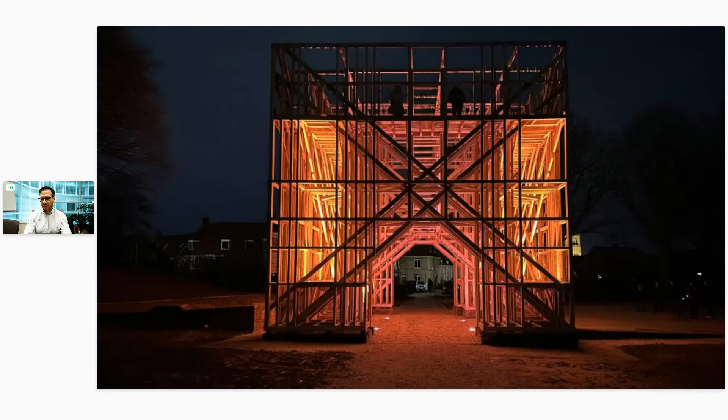She's working for AXISVM, and she's our expert. No one knows more about parametric design than her at our company. The next speaker is going to be ARC-S. Sorry, I messed up the slides, but no matter. One second. Oh, yeah. Just a few references.

So ARC-S is a Hungarian company, an innovation and technology company, consultancy firm focused on delivering innovative, sustainable, and efficient structural design solutions using state-of-the-art digital tools and engineering methodologies. The company combines technical expertise with continuous development, supporting their clients in creating economic, sustainable, and adaptable designs.

Our second speaker will be Summum Engineering, and they have these references that I'm showing on the slides right now. Summum Engineering is a structural design, engineering, and optimization consultancy founded in 2017 and based in Rotterdam, Netherlands. It operates in the domains of architecture, engineering, and construction, as well as industrial design and art. Specialties include the parametric modeling and structural engineering of lightweight structures, natural building materials, complex geometries, and sustainable buildings.

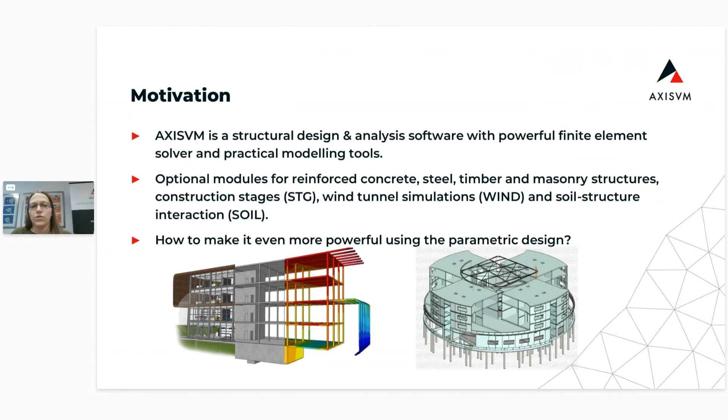This is a very strong package, I think, but we can never be completely satisfied. We always try to find how to make it more useful and more powerful. And in this webinar, the guest presenters and I show a bunch of ideas how to extend AXISVM capabilities using parametric design. First, let's take a look at parametric design in general.

In traditional computer-aided design, the so-called CAD process, the user must basically know the position of the lines and surfaces right from the beginning. Every item is created by direct manipulation by hand. And almost 25 years ago, some developers started to break the limitations of traditional CAD modeling. GenerativeComponents by Bentley was the first parametric design software for architects. It was published in 2003 and officially released in 2007.

Another milestone was the release of Explicit History. Nowadays, it's called Grasshopper, and this is a visual programming interface for the Rhino CAD software. This turned the design process from modeling with direct manipulation to another logic I'm going to describe now. What is parametric design? I tried to find a short and simple definition for parametric design, and I decided to explain it as programming-aided design.

But don't be afraid, by programming I do not mean coding in Visual Studio, etc., but rather the joyful visual programming or maybe some scripting. But I could say algorithm-based design as well. The main point is that instead of directly creating and manipulating each and every item of a model, users build algorithms. An algorithm is practically a function, a collection of rules, relationships, or transformations.

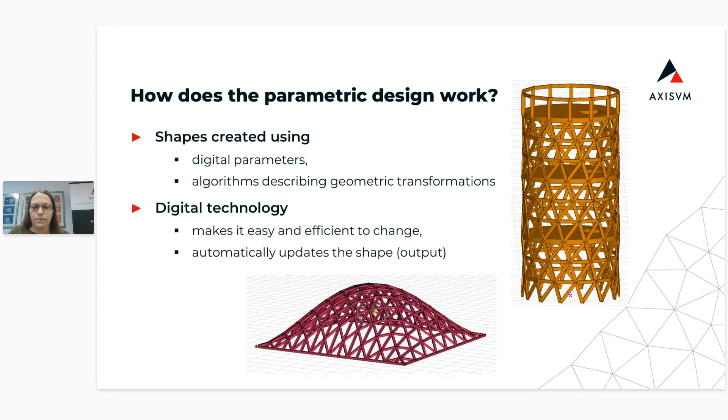What does this mean? Let me mention the valuable thoughts of Bálint Bocheim. He's a Hungarian assistant lecturer of architecture. He says that parametric design is not a new style in architecture, but rather a change in mindset. The engineers are thinking about design in a new way, utilizing new possibilities. This new mindset and new possibilities give more space for experiments, ideas, and changes. And not just for architects, jewelry, and industrial design.

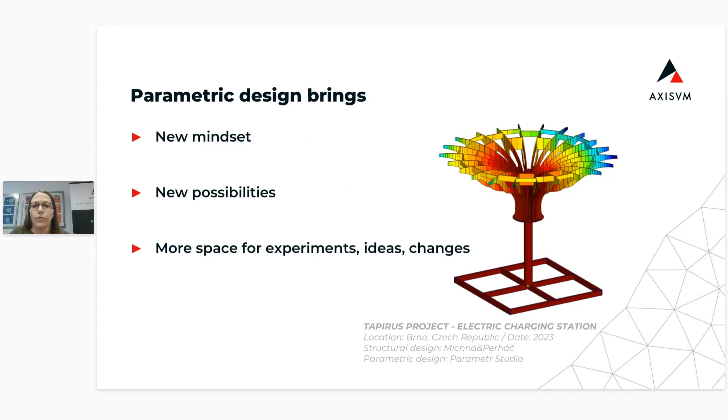And I say this because people who hear the words parametric design usually associate first to some futuristic organic shapes. The good news is that parametric design has many other advantages as well, and every engineer, so the structural engineers, can also utilize its power. Let's see the main advantages.

First, the interoperability, which is the key to make parametric design widely used. Many famous companies offer parametric design solutions. You can see some examples on the slide, from Autodesk Dynamo to Graphisoft Param-O, through McNeel's Rhino Grasshopper till the Trimble SketchUp software. These systems provide platforms where users can create algorithms and visualize the design response. Furthermore, they are able to cooperate with other software.

From this list, for example, the Rhino Grasshopper provides a very high level of interoperability. For example, and really only just some examples, it can take input data from Excel, from AutoCAD. It can create and handle 3D models from Tekla, Revit, Archicad, etc. It can build and import structural analysis models from RFEM, FEM-Design, Sofistik, Consteel, AxisVM. It can perform detailed calculations, again with Excel or ANSYS or IDEA StatiCa, etc.

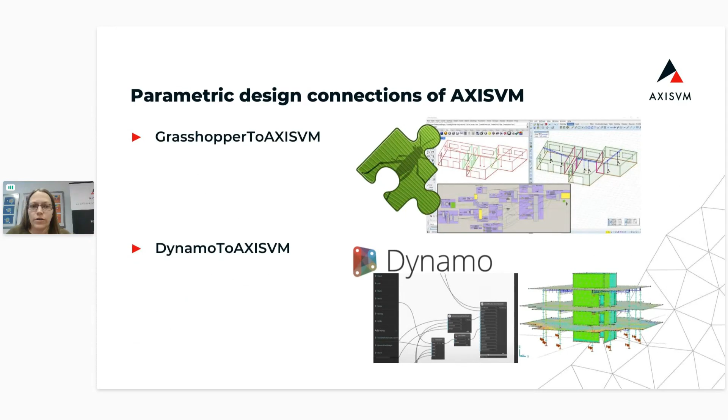AxisVM has its own connection to Rhino Grasshopper and to Dynamo from this list. And in the examples of this webinar, the Grasshopper to AxisVM add-on has been used. About the capabilities of the add-on, I'm going to say some words later on. But first, you can get an impression of how to make finite element model preparation quicker and more convenient by transforming the geometric input data into a finite element model with the aid of the parametric design software. This example is introduced by our guest speaker, Dr. Nagy András from ARC-S Group. And I start his session.

Hello, everyone. In practice, many design engineers experience that a significant portion of time is often spent on preparation for the actual design work, such as aligning the geometry, modeling, or lengthy preliminary calculations.

So we thought that we need some kind of workflow which is able to transform geometric data to a base finite element model. We wanted it to work without any pre-modeling from our side. Only an input as the geometry and an output of a finite element model. So what do we require exactly from the script? The script must be able to process IFC or DWG. That's the whole point of it.

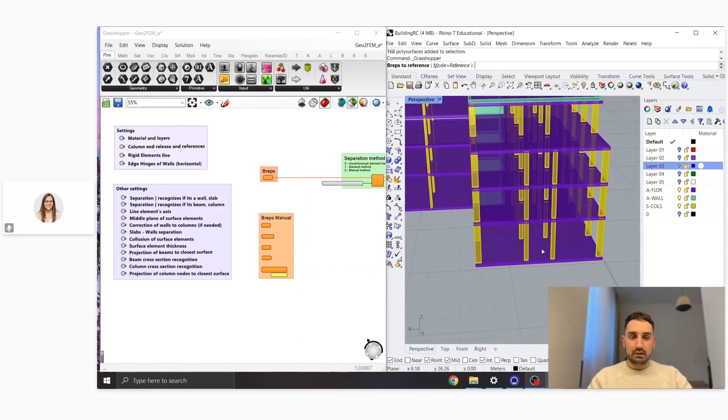This first example is an RC building which has different kinds of columns, slab thicknesses, cores, and so on. So we define it with the algorithm by selecting all of the elements, and the algorithm tries to distinguish the elements based on a separation method.

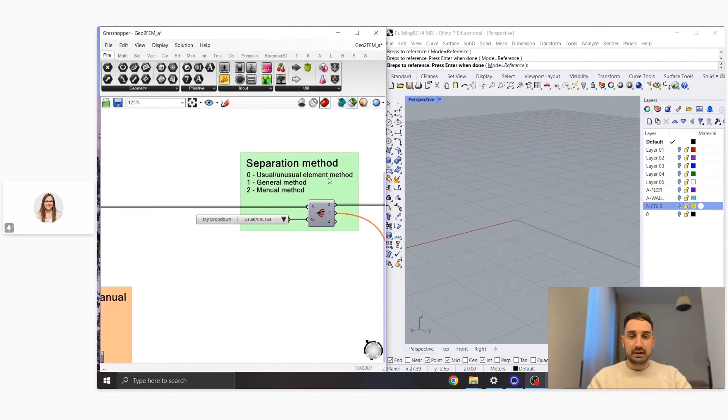So we actually have 3 separation methods. All of them are a bit different in terms of logic and aspect. And these separation methods distinguish elements, whether they are walls, columns, beams, or slabs. So the algorithm tries to understand not just the geometry, but also the materials, and it ultimately defines the AXISVM model out of the DWG, which you can see here.

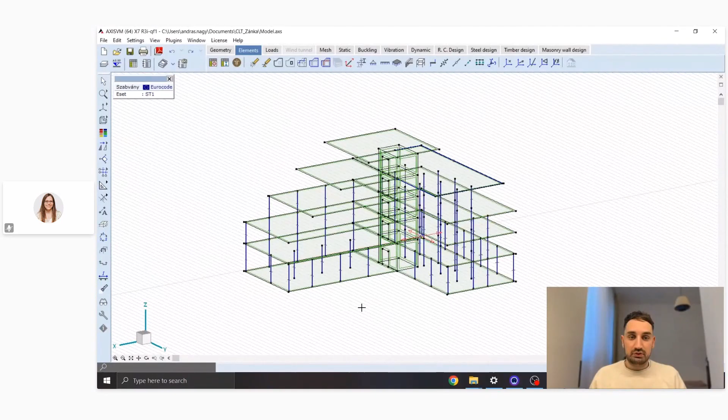You can see the difference between the materials, you can see the geometry, you can see all the elements which were chosen, and also it tries to understand the levels and numbering them as well, so we can have a filter on the levels.

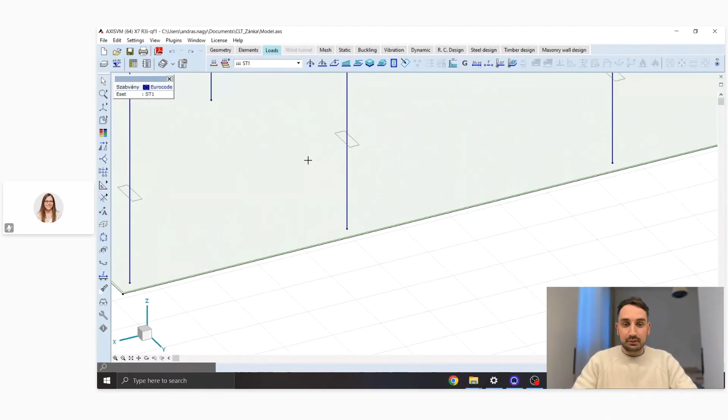Now, what if we'd like to consider the cross-section in a proper slab design? We can use, let's say, rigid elements. We just turn them on, and the rigid elements will be placed according to the cross-section of the elements below and above. So you can see that every rigid element length is actually the same as the width and the height would be for the cross-sections above or below.

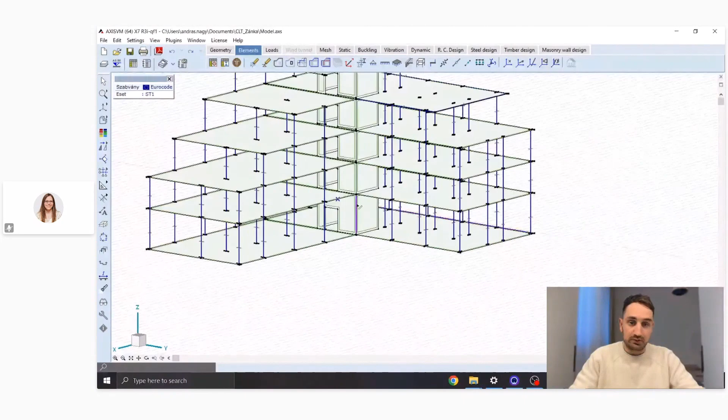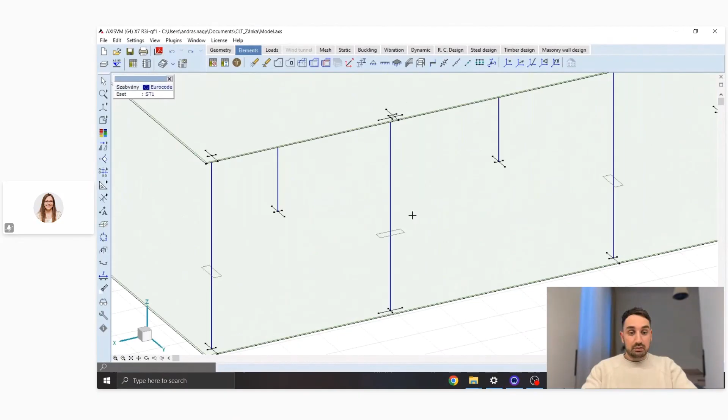One of the big advantages of using this workflow is that we are actually able to edit the geometry in Rhino. So whenever we feel like a certain element needs to be rescaled, modified, whatsoever, we can just do it and the whole script will follow accordingly. So in this case, I rotated this column and we can see that it's been rotated in the AXISVM model as well.

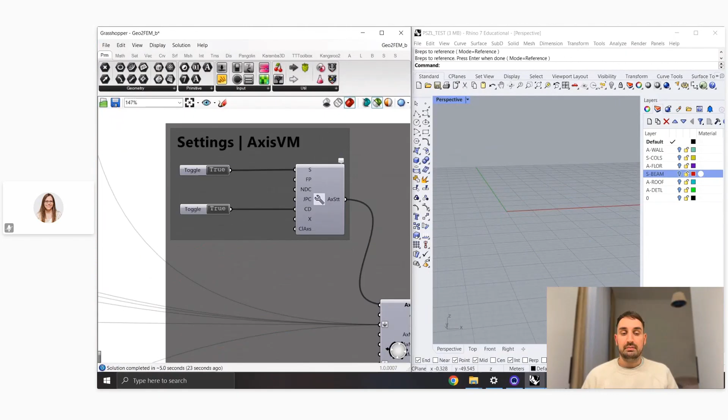This second case is a very interesting timber building with tilted roof and elevation differences. This time we used a manual method for the separation, and after defining some very basic parameters such as the end hinges and some other stiffness, then we can generate the model without any issues.

Engineers may use the same base model for multiple purposes within seamless teamwork to avoid duplicated modeling efforts and reduce potential errors that would occur during data transfer. And this whole thing speeds up the workflow. The following topic is the flexibility.

We may import or build really complex structures in AXISVM even with the traditional modeling approach. But if we have a curved structure and we need to make geometric manipulations, it can be really hard. Let me show a very simple example to feel the difference. I'm going to share 2 short videos.

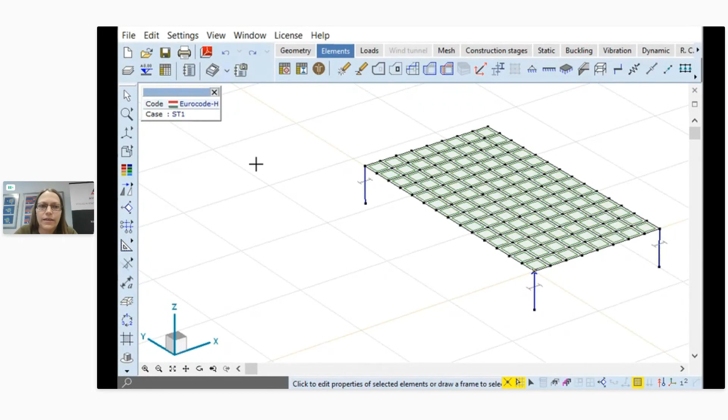And in this first example, I have a flat deck in AXISVM, and I'm going to select the nodes. And with the property editor, I can translate them, for example, in Z direction with an expression just to get a curved shape. And the expression immediately disappears from the property editor as soon as the transformation is finished.

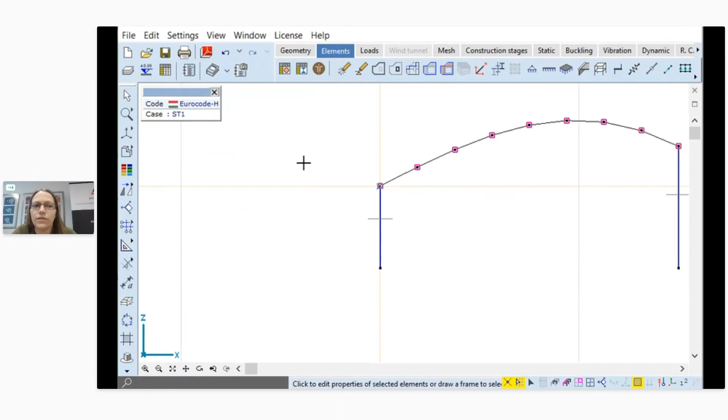If later, for any reason, I would like to change the shape, I must go back to the property editor, type a new expression from scratch to modify the shape. This is a traditional process.

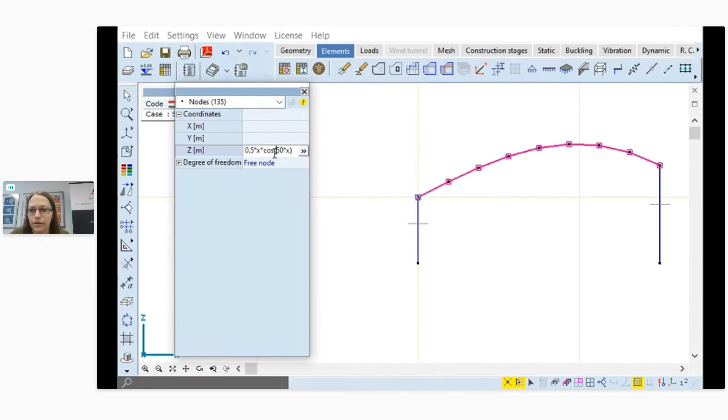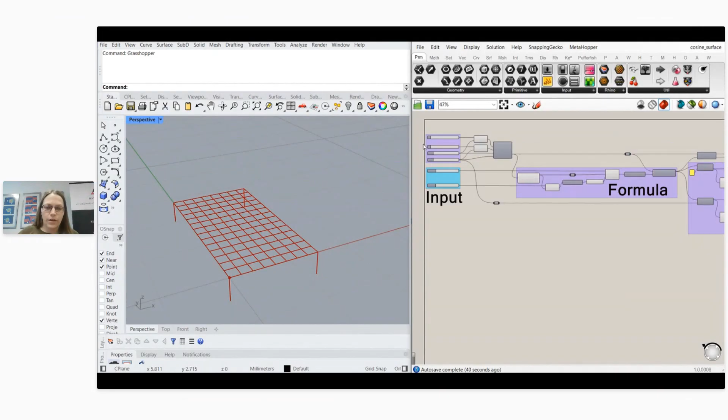And then in the next video, I'm going to show how it goes in the Grasshopper environment. In contrast to the traditional solution, parametric design allows to change the geometry in an extremely flexible way. The number sliders belong to the separate input parameters, and by moving the sliders, the geometry is immediately adjusted.

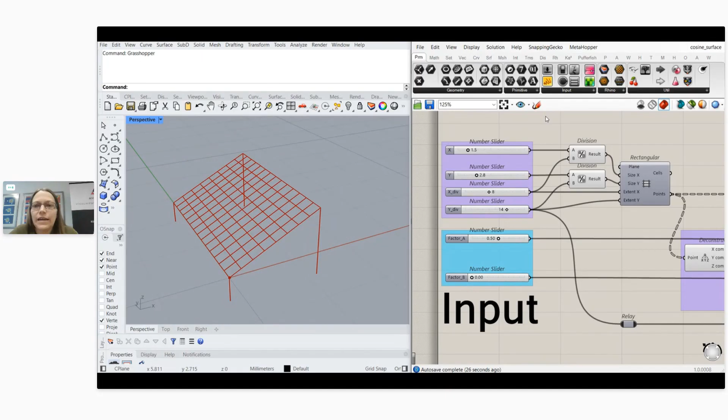The algorithm fed with the inputs in the blue group describes the same expression I used in the property editor in the previous video. Since the design intent is included in this script, I do not have to give the expression in each step from scratch. And the elements can be transferred to AXISVM.

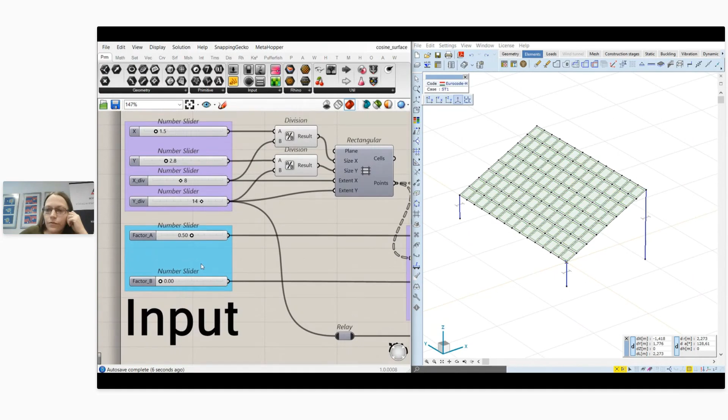This is the first version. This is flat. Then I modify it to be curved. And if I want to change it, I just type in another number or move the slider, and that's it.

You already saw that the GrasshopperToAXISVM add-on can be used to transfer parametric models to AXISVM and ensures the flexibility. But I give now an overview about all other features as well. The add-on provides two-way collaboration between AXISVM and Rhino Grasshopper. It makes it feasible to create complex parametric models and transfer them to AXISVM.

For model building, the add-on offers a wide range of components. For example, it has access to the AXISVM material, cross-section, and CLT panel library. It can be used to define, for example, parametric cross-sections, structural members, and domains, and their connections. And the items may be grouped into custom parts as well.

After support creation and load definition and meshing, the user may create steel and timber design members and start finite element analysis. This can be currently linear and nonlinear static, buckling, vibration, or seismic analysis. Then a user can perform cross-section optimization for steel and timber design members and can import some results back into Grasshopper, for example, displacements, internal forces, and stresses.

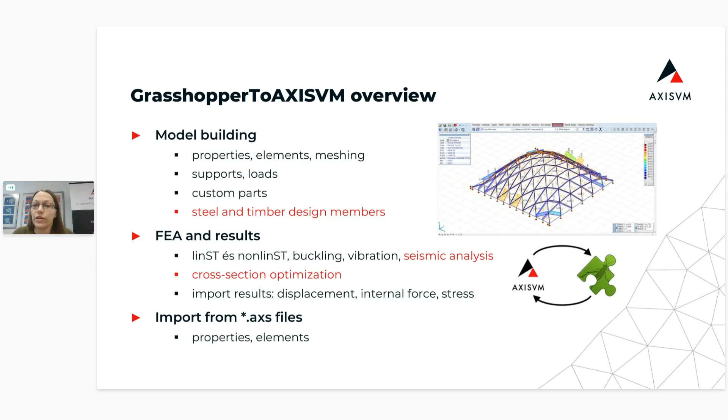The add-on can also import the main items of existing AXS files, can extract the elements' properties, and, for example, can generate parametric loads on them. When the export and import process starts, AXISVM opens automatically and displays the structure almost immediately and updates as soon as the parameters are changed. And all these features help to benefit from the flexibility of parametric design with AXISVM.

We need to be flexible because, as you know, changes always occur. In best case, they are planned. I mean, if we analyze model variants in the pre-design phase, we know that we must modify the parameters. But we are all human, so changes are needed sometimes due to mistakes. And even if you never make mistakes, I'm sure you have at least a colleague or, in worst case, a boss who does. So then the modeling and the process must also be repeated.

Third scenario may be the change of requirements indicated on the customer side or by any other limitation that must be considered. With the parametric modeling, the complete process is automatically repeated. This way, the impact of these changes on the project timeline can be significantly reduced. This is why below the interoperability, I noted also the flexibility as advantage, since we can easily manage the model variants with the parametric design regardless the root cause of any required change.

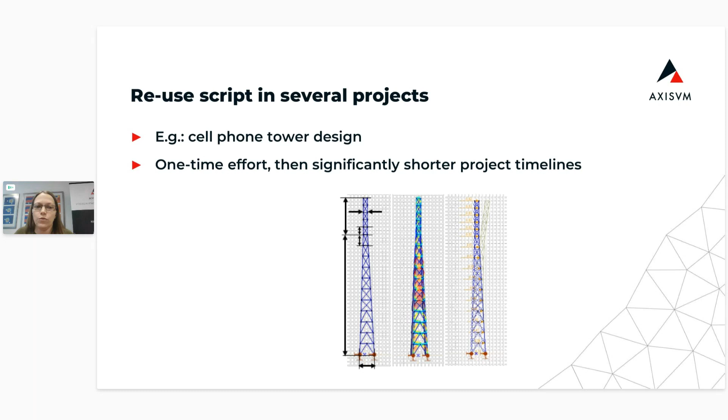Let's see some examples for repetitive design principles, for unconventional structures, and for the process automation from parametric modeling to the design validation. Our guest speaker, Torin Moore from Summum Engineering, is going to guide us through their parametric world. I start his presentation.

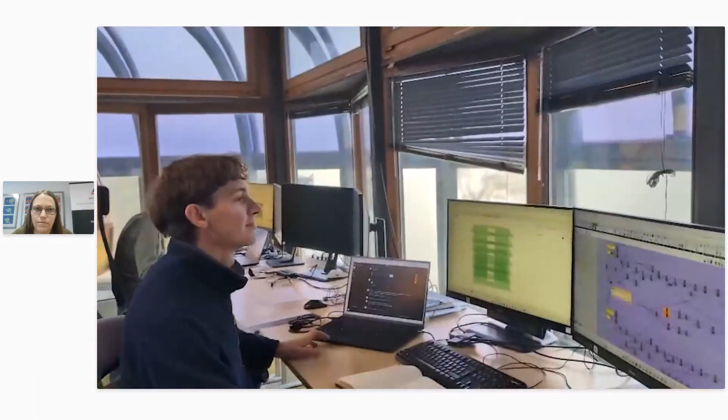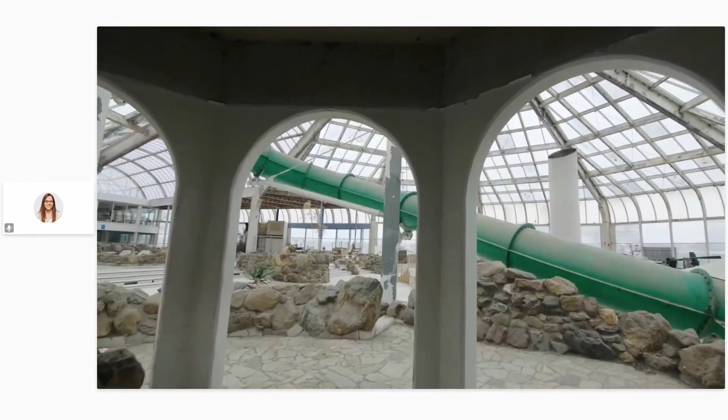Hello everyone, my name is Torin Moore and I'm a structural engineer at the Summum Engineering Cooperative in the Netherlands. Today I'd like to take you through some of our unique projects that we engineer with the help of AXISVM and its Grasshopper plugin. Summum Engineering is an award-winning structural engineering consultancy founded in 2017 in Rotterdam. We're located in Blue City, a former tropical swimming pool that has been transformed into a circular economy hub. Summum Engineering is a worker-owned cooperative and a social enterprise. This means that the young and international team collectively determine the company's direction.

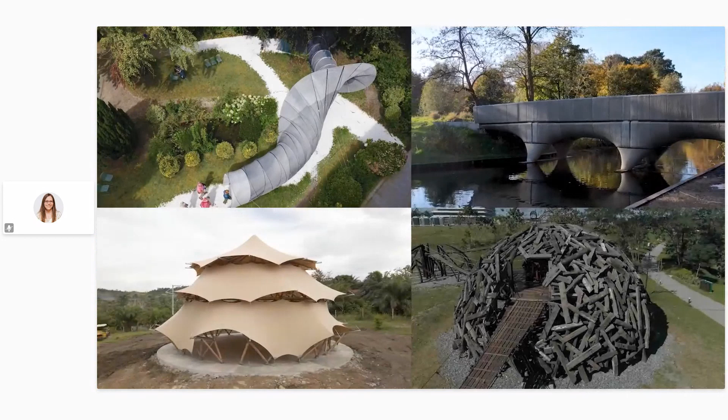Our official goal is to contribute towards a better society and environment in general, with specific focus on a sustainable built environment. Therefore, we focus on projects that tick one or more of the following 4 boxes: light, digital, natural, and circular. We work on lightweight structures such as membrane, shell, and spatial structures to minimize weight, and structures made by digital fabrication to place material where it's most effective. We also work on structures made from natural, bio-based, earthen, and low-carbon materials, and renovations of existing buildings, or new structures that reuse reclaimed materials.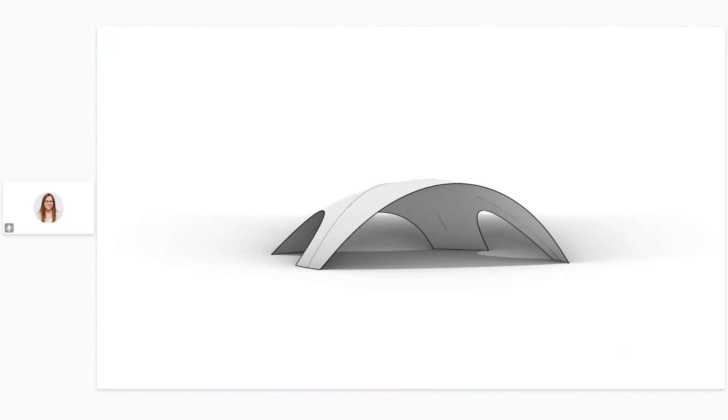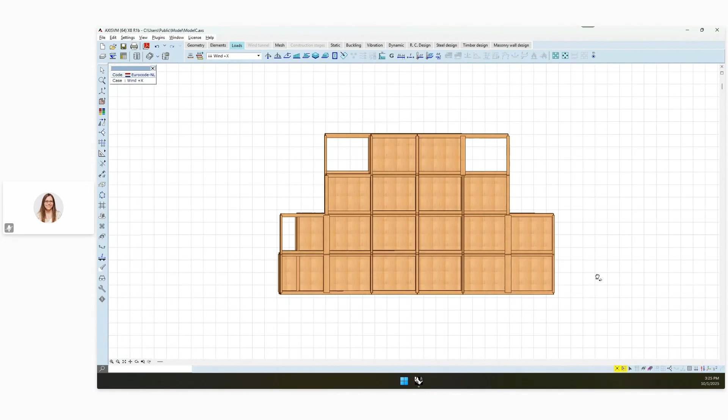These are challenging projects, so our work heavily involves the use of parametric modelling to tackle these unconventional materials, geometries, and construction methods. Part of this is finite element modelling with AXISVM. We primarily use Grasshopper and AXISVM for timber structures, particularly in final design phases, where reports are needed for permit applications, and detailed design phases, where internal forces are needed for calculation of connections.

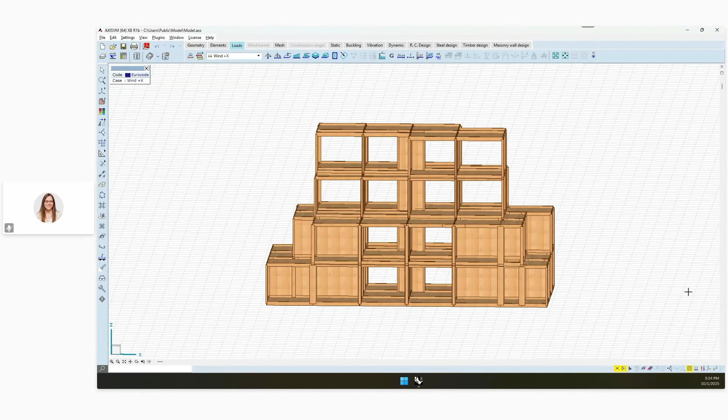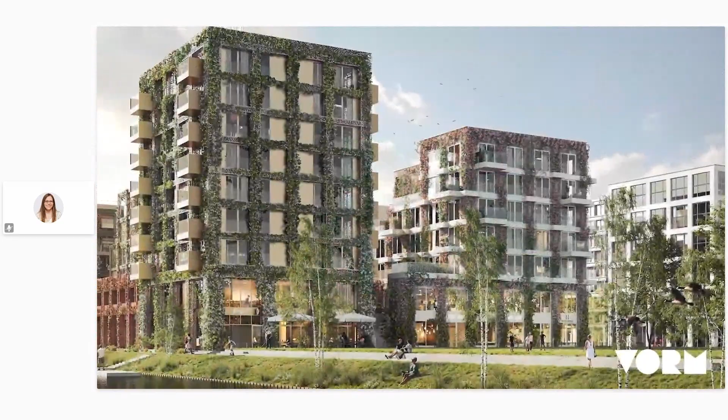AXISVM's Parametric plugin is especially useful for projects in which the geometry is complex and where design principles are repetitive. An example of repetitive design principles is our work for Sustainer, a manufacturer of modular timber housing using prefabricated modules of laminated veneer lumber. The various configurations are imported to our parametric models for further global and detailed engineering. Although each design can vary in size, shape, and location, meaning dimensioning and connection details can differ too, the underlying principles remain the same, making it an ideal candidate for parameterization.

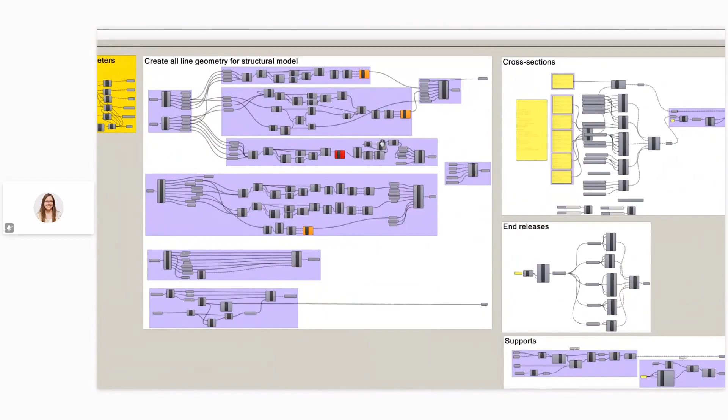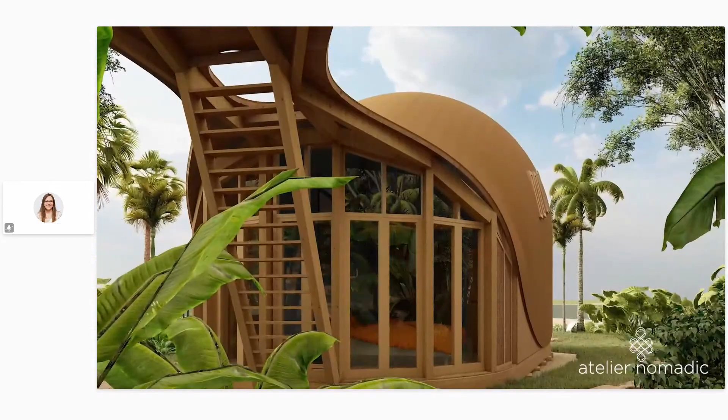We are working on multiple projects, with emphasis on Gooi, a project in technical design stages planned to be built in Amsterdam. An example of the former is the Whale House, a timber lodge for an eco-resort in Tanzania, inspired by the whales that can be seen off the coast of Mafia Island. The structure features curved glulam arches and custom carpentry to achieve the unique design by Atelier Nomadic. AXISVM allowed for the conversion of the architect's 3D model into a structural model, the iteration of different options for its materiality, and the application of extreme wind loads due to hurricanes to the doubly curved geometry.

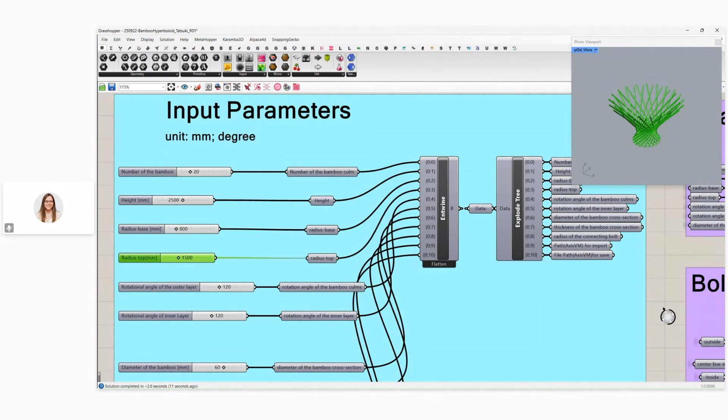In the past year, Summum Engineering has been asked on three separate occasions to engineer a bamboo hyperboloid. With a parametric script and the AXISVM plugin, we are able to calculate the internal forces, which are then used to detail the connections of the intersections of bamboo culms. Grasshopper helps us manage the complex hyperboloid geometry, where inputs like bamboo length and thickness, number of culms, and the radii of the openings are defined as variable parameters.

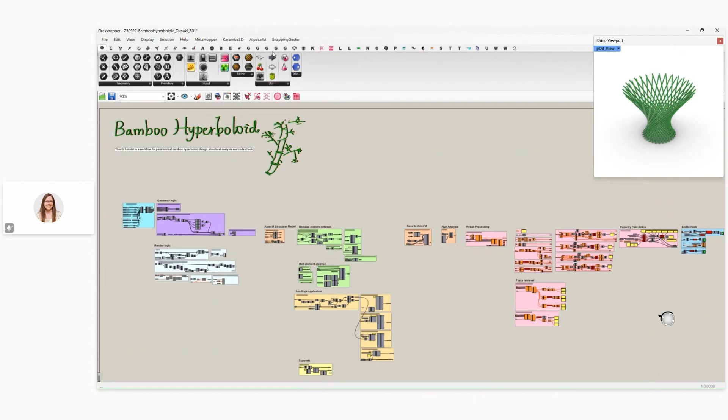Let's go through the script together, step by step. First, we define all the parameters which we use to generate the geometry. The geometry is rendered in a Rhino viewport and will update synchronously with changes to the input parameters.

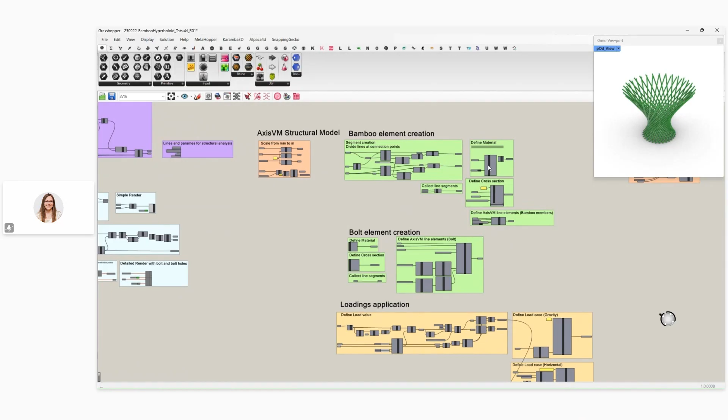Next, the geometry is translated into an AXISVM model. The green components define all the line elements, including the bamboo and bolt elements. We also define the material properties and the cross-sections for each. Then we assign the loads and supports. Here the model is assembled, and with the click of a button, the geometry is sent directly to AXISVM.

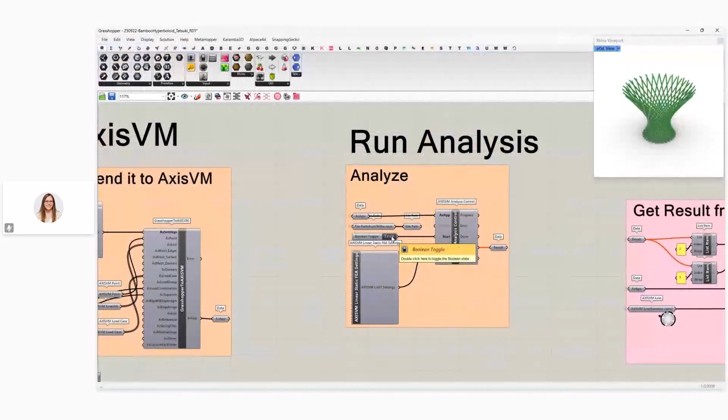Once the geometry is set up, we can run the analysis directly from Grasshopper. After the analysis finishes in AXISVM, the results are sent back into Grasshopper. Since the AXISVM plugin works bidirectionally, we can both send the model and receive results. With the results imported into Grasshopper, we can check the strength of the structure according to the relevant design codes. This makes it possible to validate the design within the same workflow.

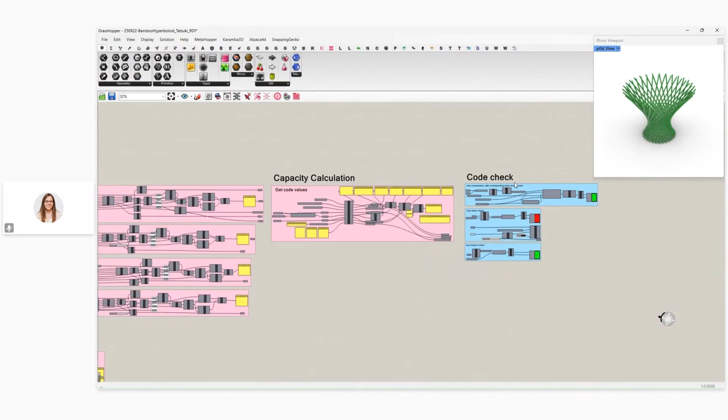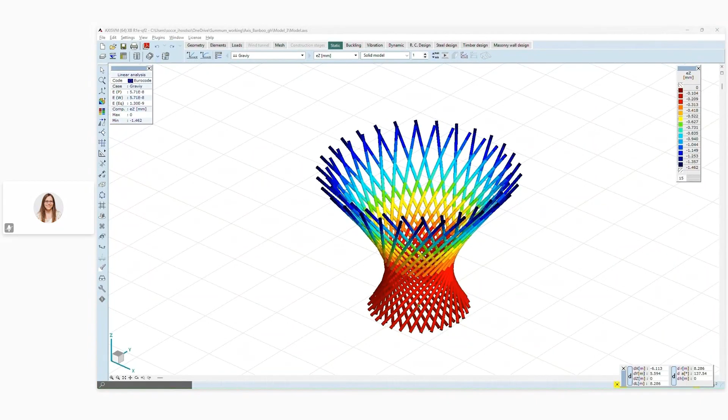As this workflow is fully parametric, the model is also synchronously updated before being transferred to AXISVM. The analysis is rerun, and the results are returned to Grasshopper. This allows for testing many iterations of the design. This workflow shows how Grasshopper and AXISVM can be used together. The combination of softwares is useful for both everyday applications, such as truss design and parametric studies, and more complex geometries, like this hyperboloid.

After this great presentation related to automatization, I mentioned the fact that Grasshopper not only allows us to coordinate structural design and analysis, but also allows us to examine countless aspects in order to build structures that are as sustainable and as optimal as possible.

Grasshopper has add-ons, for example, for shape finding and optimization, for daylight, acoustic, and wind comfort analysis to check how the building would fit best into its environment. And we can also control the material usage to keep costs in an optimal range, and so on. So there are hundreds of add-ons you can use in this field.

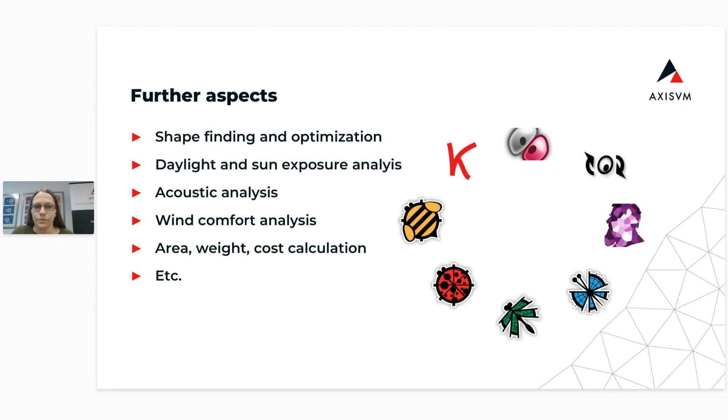It is already automatization if we build a script and set up a parametric process. But we can go one step further and let the script automatically run and investigate more than 50,000 variants. Mokhtar Tantavi from Arkesh Group presents us a case study example for this.

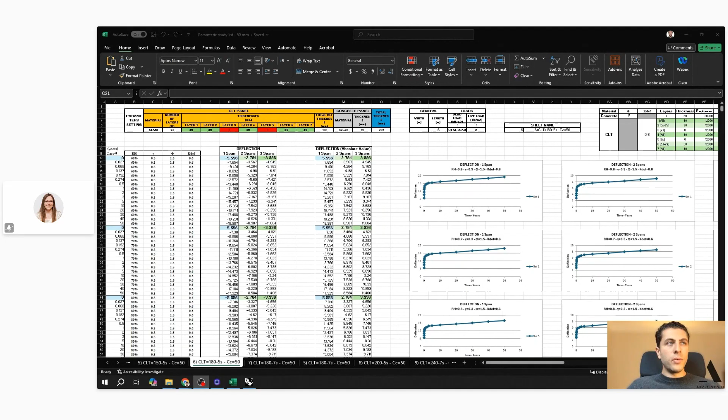If you've worked in the engineering industry before, then you probably know the pain of having to repeat multiple tasks over and over again. So what we usually do is try to automate the tasks in our PhD industry research. To explain the problem in simple terms, this is a CLT concrete composite deck, and these two materials behave differently over time. So our goal was to understand the global behavior with so many different variables: the shrinkage of the concrete, the creep of it, the creep of the timber, and also the connection efficiency between both materials.

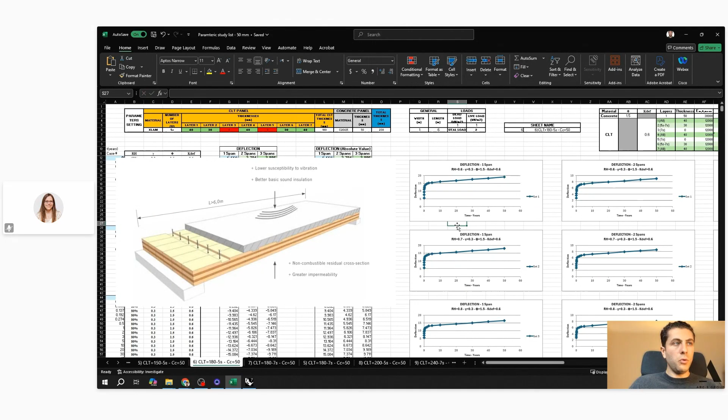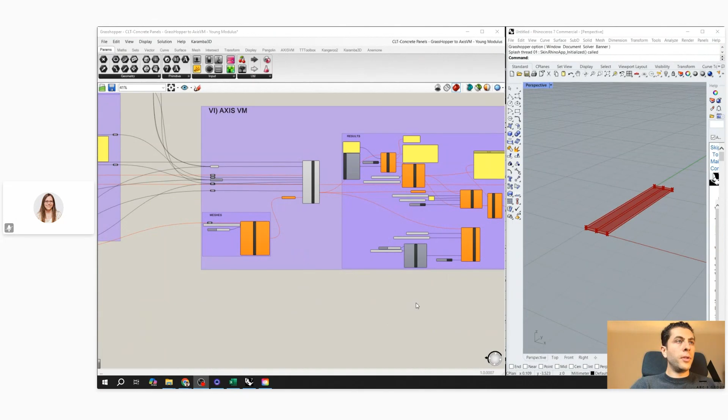With this many variables, it was not possible to do this manually, so we had to resort to an automated solution. The choice to use Grasshopper was an easy one, since we were already familiar with it in the company, and for the nature of engineering problems, it would be very beneficial to visualize the code. For the structural analysis, we decided to go with AXISVM because their components are very easy to use, and in the end, the result display is easily understood.

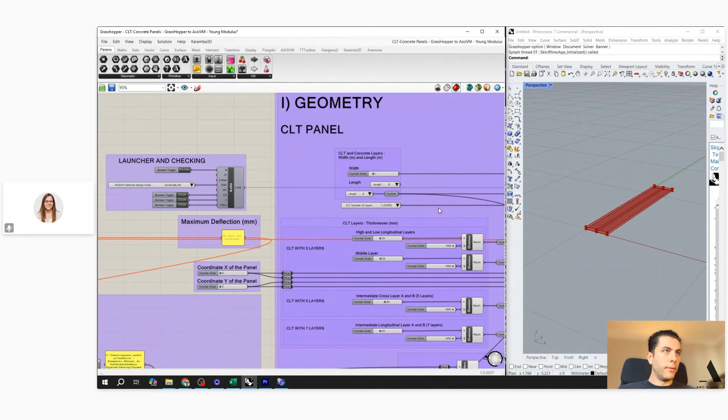To go over the code very quickly, here we have the loop part that reads information from an Excel file for different points in time, and then feeds it into the Grasshopper code. In this part, we've already defined the geometry, the number of layers for the CLT, the width, and the loads, and all the different variables we want to define manually.

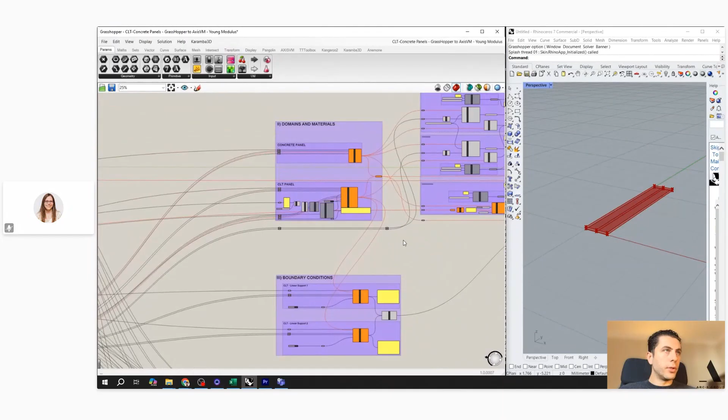The rest of the code defines the geometry. It works automatically, defining the concrete segments for the link elements and the boundary conditions, all based on what we defined earlier. And in the end, this is the AXISVM part—it creates the meshes, does the analysis, and reads the results.

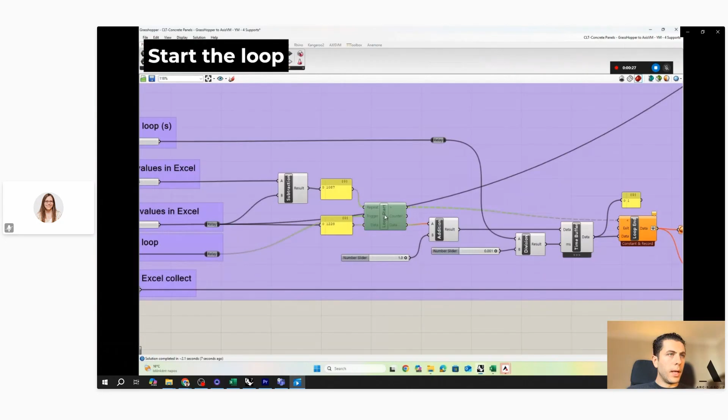Now to show you how the code works, first we launch the analysis. The model is created in Axis, and then we run the loop. We enable a component, set the range of the information where we want the data to be read from Excel, and then you can see the analysis running automatically, creating the loads and meshes.

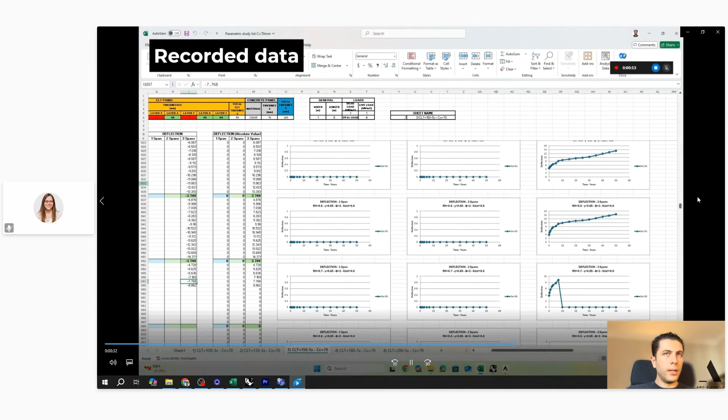Afterwards, the data is read back into the Excel file, and the graph is created automatically. Running a few thousand analyses simply wouldn't have been possible without the Grasshopper loop and the AXISVM components. Together, they saved us countless hours of manual work and gave us clear, reliable results we can build on.

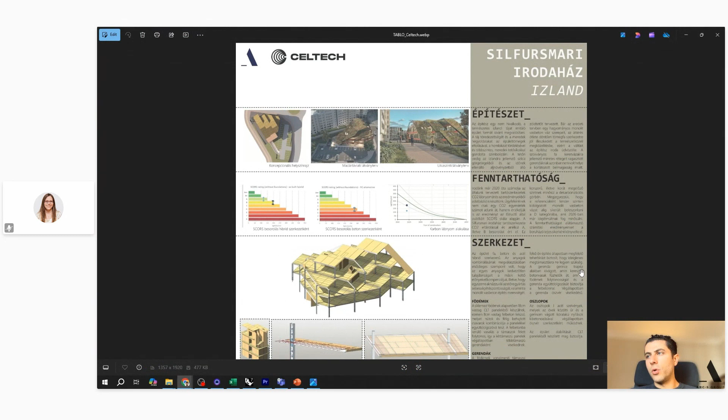At Arkesh, our deep experience with CLT and CLT-concrete composite technologies drives us to find feasible, economical, and innovative solutions. This mindset led us to start this research, and it's the same approach behind our Silfursmari office building in Iceland—a state-of-the-art hybrid structure that merges sustainability with engineering precision. Projects like this show how combining our expertise with AXISVM's powerful analysis tools allows us to push timber-concrete technology forward.

During this webinar, you've already seen fantastic structures with unconventional shapes presented by our guest speakers. Last but not least, I highlight the handling of complex shapes as a separate advantage of parametric design, and I would like to show two further use cases with AXISVM for this topic.

The first one is a complex load profile. In the grain silo, the horizontal pressure can be described by an exponential function, and the position of the load profile—the height—depends on the actual filling level of the silo. This load profile can be defined as a parametric fluid load, and then it can be easily adjusted to any partial filling as well.

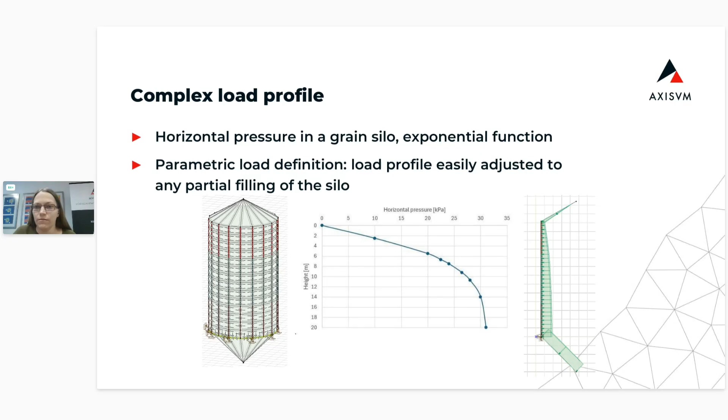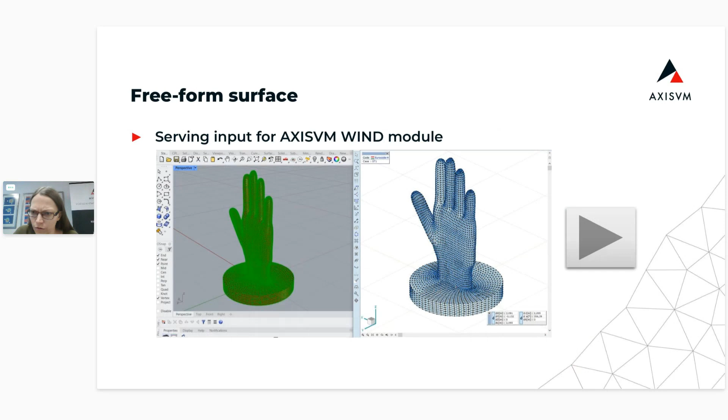The other example is this freeform surface structure, because parametric design software offers great tools to create freeform structures. I want to show just a dummy model starting from a cone and just moving the surfaces to create any shape we want. It's really so simple—you select some surfaces, move them in space, and any shape can be created, whatever the user wants.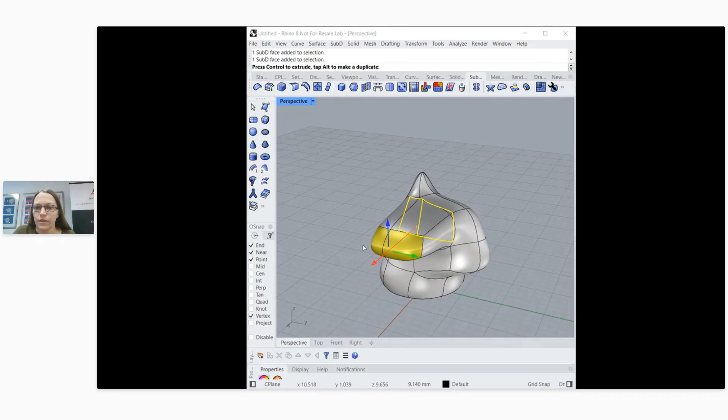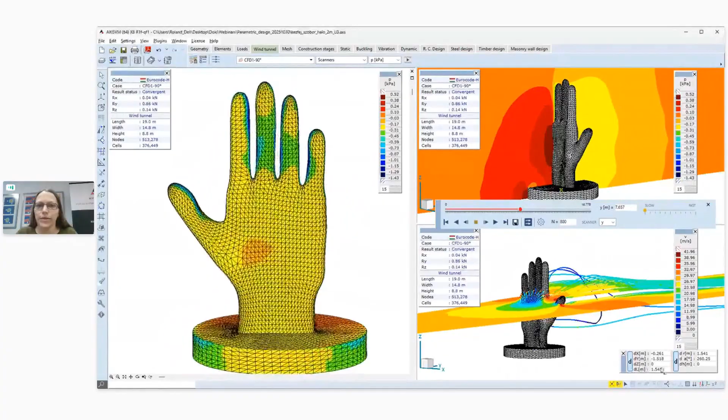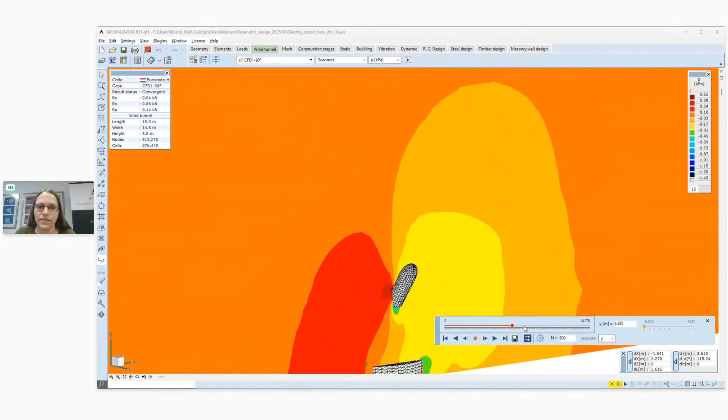After this dummy example, here is a hand-shaped installation model, created the same way in Rhino. The surfaces were modelled in Rhino Grasshopper and transferred to AXISVM, where a digital wind tunnel simulation was performed. You can see the wind pressure on the surfaces, the animated horizontal streamlines, and then with the scanner display mode, you can check the pressure distribution in any arbitrary section in space.

With this, we are at the end of the presentation. Let me say a big thank you to our guest speakers from Arkesh and Summum Engineering for their high-quality presentations, which provided very impressive examples of the use of parametric design. I think these examples have clearly demonstrated the advantages of parametric design listed here: interoperability, flexibility, automatization, and handling of complex shapes.

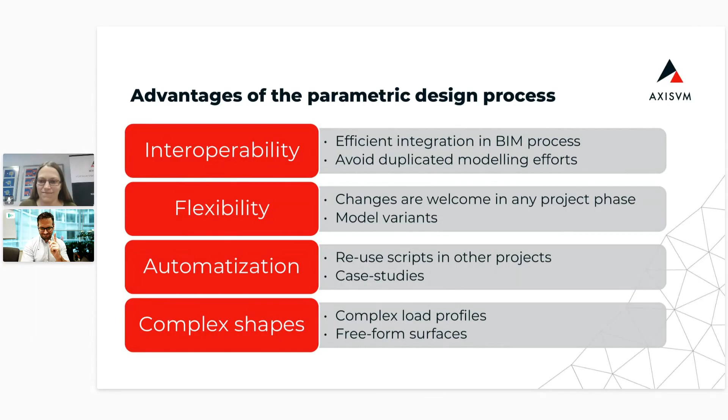Excuse us for that one. We're just in the same room, so it happens.

The first question is from Frank, who asks what properties in the Revit model are most important to add to the model in order to cooperate with Dynamo Grasshopper. I will ask Sandra to answer this one.

I recommend checking the guideline of our Dynamo and Grasshopper add-on, because there you can see every component and which inputs we need. But practically, as you see in the first ArcAsh video, from the geometry you can import a lot of stuff. For example, they detected what is a slab, what is a column, what is a wall, based on the dimensions - how the edge length is related to the surface area. So I think that's it.